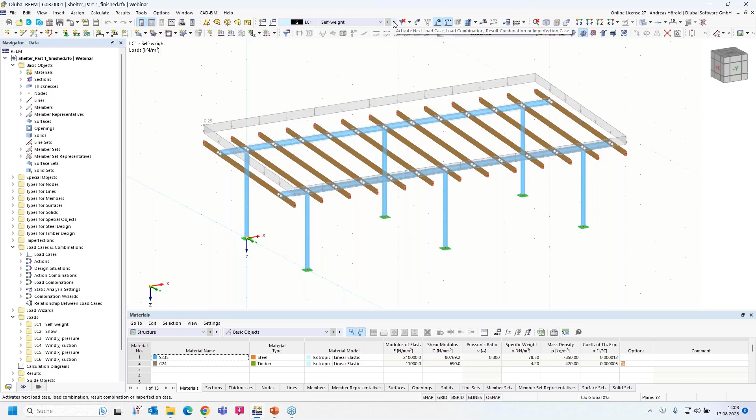Then I open the program. That's the state from the first part of the webinar that we presented last week. I created this model and the different load cases: self-weight, snow, 2 wind load cases in Y direction and 2 wind load cases in X direction. I go back to the base data, what we selected last week.

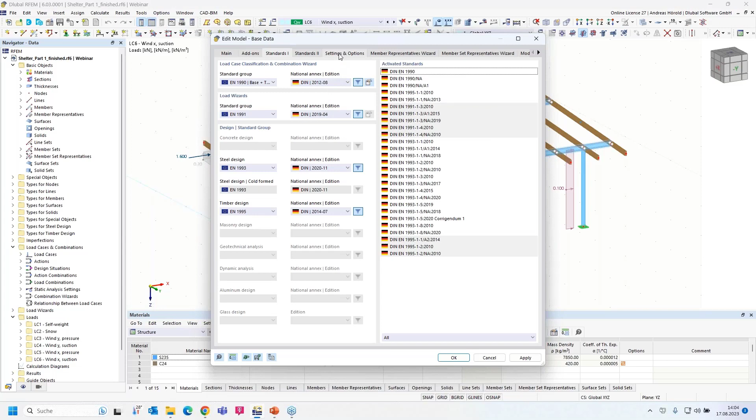I activated the 2 add-ons, one for steel design and one for the timber design. Also, the combination wizards are checked, and I selected the different Eurocode standards with the German National Annex. And under settings and options, I activated the member representatives and the member set representatives.

I would like to design only one representative, for example, and all members that have the same properties, the same length, for example, same cross-section, are collected in one representative, and I design only one of them. So in the member representatives wizard, all steel and timber design properties are checked, and the same for the member set representatives. Okay, I'll leave the dialogue and I start with applying the imperfections.

On the left side, you can see the navigator data and then the folder imperfections. At first I have to select or create an imperfection case. I can do that with a right click and then new imperfection case. The imperfection case collects the imperfections. After the creation of the imperfection case, I need to create the imperfections.

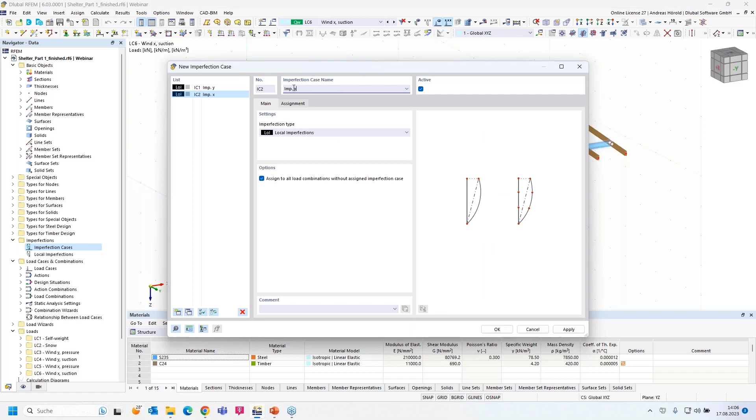Then on the bottom left, I check create new imperfection case. I call it imp x and assign the wind load cases in x direction. And you can see in the combinations in the background, the combinations are created automatically, and you see only the combinations with wind load case 5 and 6, and not with load case 3 and 4 anymore.

Now you can check that here. Same for imperfection y. You can't see any combination with the wind load cases 5 and 6. Only with 3 and 4, and of course the other load cases, load case 1 and load case 2, the snow load case.

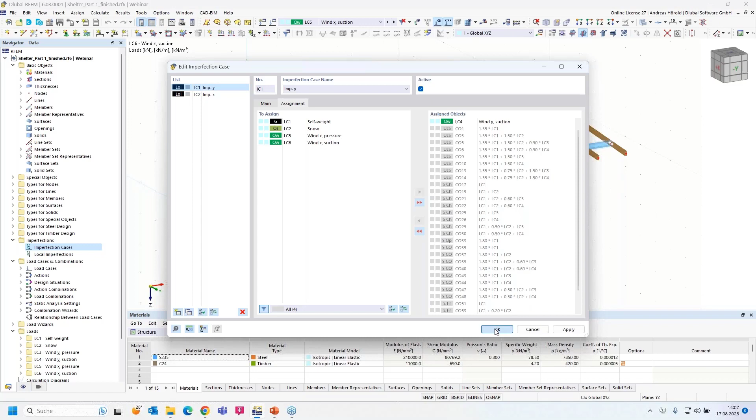Okay, I leave the dialog, and then if I go to the navigator data, I can open the local imperfections, and for example under the folder imp y, I can create a new member imperfection. With a right click on it, I can select new member imperfection. The other way is to go above here and select the button new member imperfection.

So the right imperfection case is selected. I would like to create an initial sway. I would like to assign the initial sway to the steel columns, and I will use for the steel design the equivalent member method in combination with imperfections and calculation according to second order theory. That's sufficient for the design according to the equivalent member method.

Okay, this definition type, Eurocode 3. So the coordinate system is local. Okay, I forgot to show the member axis systems. I select Y. I know that from the test. So then I measure the structure height. I measure the longer column. Doesn't matter that this column is a little bit shorter.

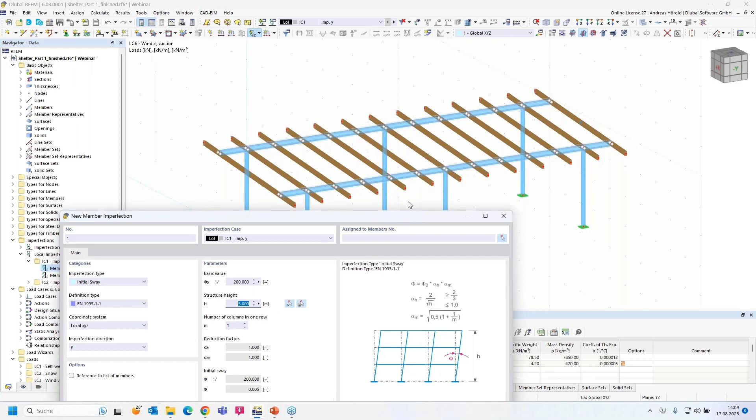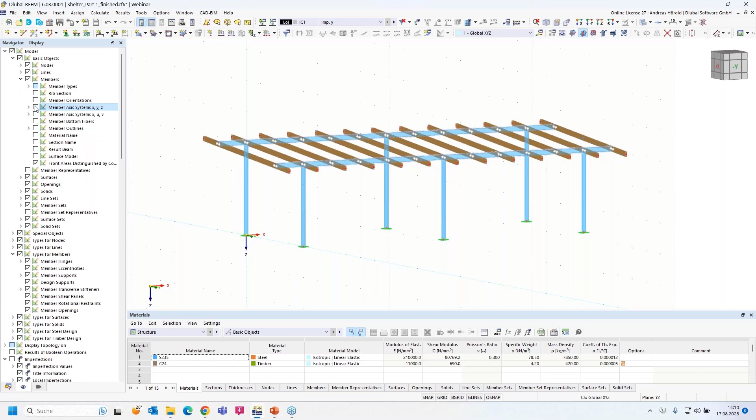2 columns should be in one row. This one and this one. And I can press OK. And I need to select the different columns. Okay, I must go in the dialog again. But before I do that, I go in the navigator display. And then under members, you can find the member axis system. So now you can see the local member axis system.

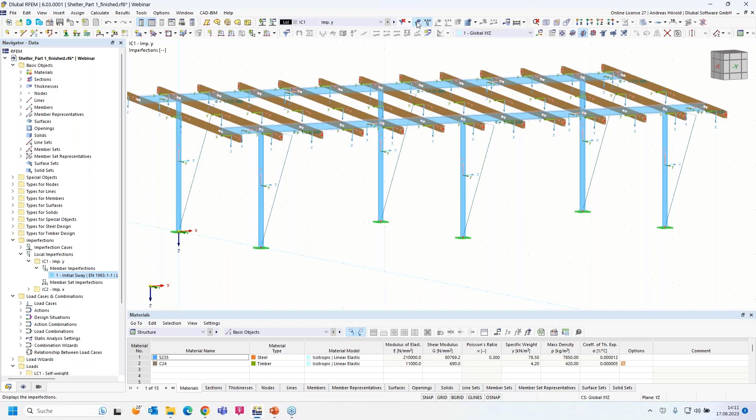And now I turn back to the navigator data, double click on the initial sway, and you can see the local Y direction is the same as the global Y direction. So I assign the different columns. Okay. And I have to select this button above, show imperfections. So the imperfections are created correctly.

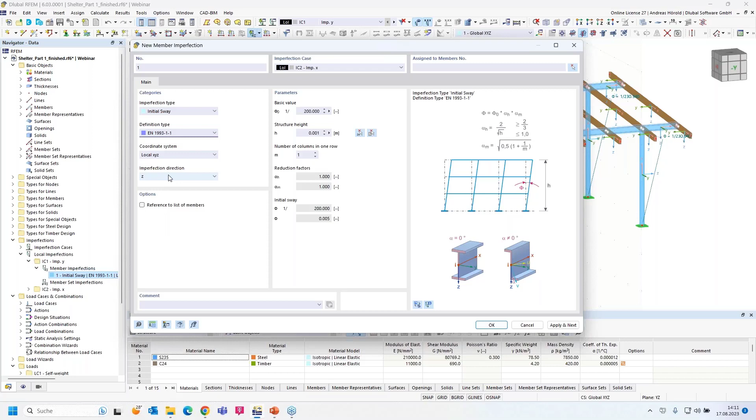So then the next imperfection, new member imperfection. This time I have to select the imperfection case 2, imp x. Again, initial sway according to Eurocode 3. This time imperfection direction Z. You can see this is the local Z direction. It's the same direction as the global X direction. Structure height is 3 and 3 columns in one row. Okay, and I select the different columns. So I select the other imperfection case, and you can see that the imperfections are defined correctly.

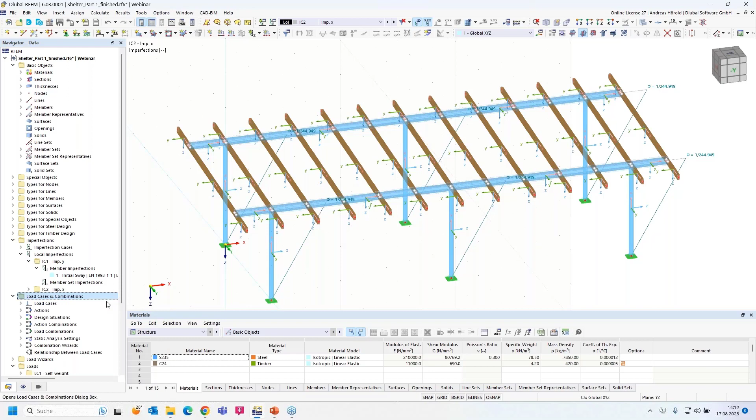Okay, then we can turn to the load cases and combinations. Here on the left side, navigator data. I right click on it and open the load cases and combinations. That's what we defined in the base data, the Eurocode 0 and the German National Annex, and of course the base and timber, because parts of the construction are from timber. And when I edit the parameters of the National Annex, I can see the KDEF factor. It's the service class 2 and it's 0.8.

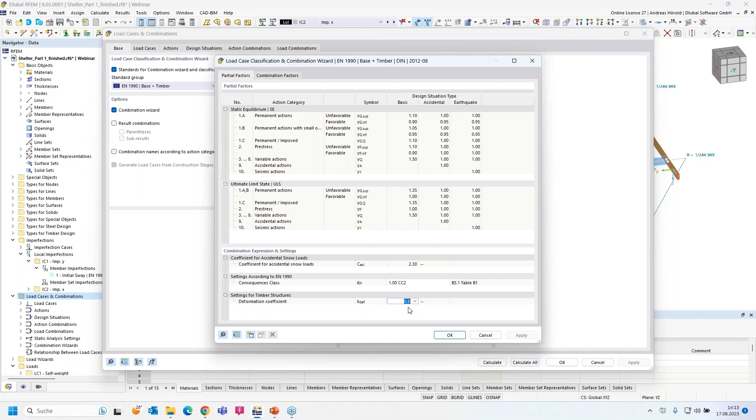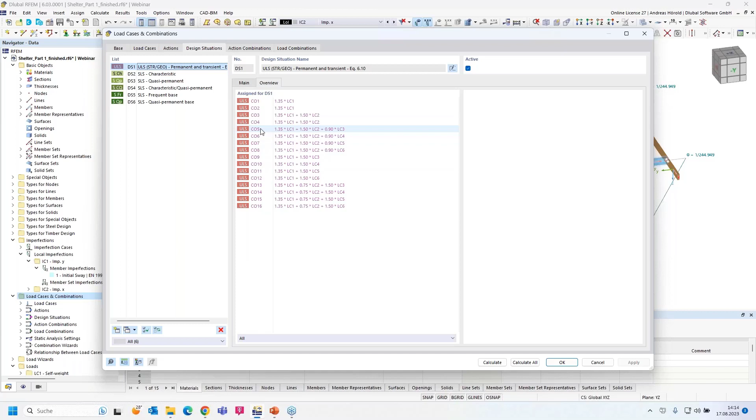Okay, so the combination wizard is activated. Those are our load cases, in the next dialog, the actions. And for the wind load cases, it's important that the alternative action type is activated. It's done automatically. You can see the 4 different wind load cases, so that we don't have more than one wind load case in one load combination. Then the design situations, 1 for the ultimate limit state design and 5 for the serviceability limit state design. If you click on one of them, you can go to the overview and see the different assigned load combinations.

And in this dialog, you activate the add-ons. You can also assign concrete design. If you activate the add-on, we activate, for example, for the ultimate limit state design, the steel design and timber design add-on. Let's go to the action combinations. And the important thing, the load combinations for ultimate limit state design and serviceability limit state design. At the moment, we have got 60 load combinations.

Let's go back to the design situations. Of course, we will activate the steel and timber design for the ultimate limit state design. For design situation number 2, the serviceability limit state design characteristic, we also activate steel design and timber design. That's all for the steel design.

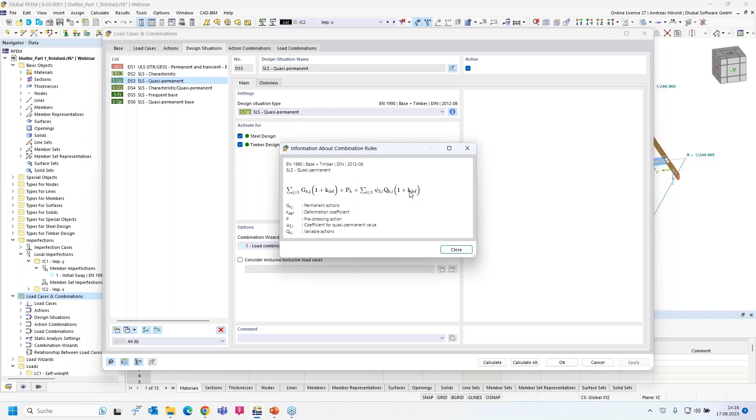And we check if we need this serviceability limit state design quasi-permanent for the timber design. I go to the info button, and in the combination rules you can see the KDEF factor, which is quite important for the timber combinations. That's why we need this design situation for the timber design. You can leave the dialog, uncheck the steel design. We check the same for design situation number 4, information, and we can see the KDEF factor again. That's why we need it also for the timber design.

And we don't need it for the frequent base. You can't see the KDEF factor here. So that's why I delete these 2 design situations.

So again, this design situation for both - this and design situation 3 for timber design, and 4 also for timber design. So with the Shift key, I select the 3 serviceability limit state design situations and check the geometrical linear analysis. And for the ultimate limit state design, the second order theory.

So now we go back to the load combinations, and you can see there are 45 load combinations. Let me check if all is correct. Yeah, all should be correct. So that's all for the combinations.

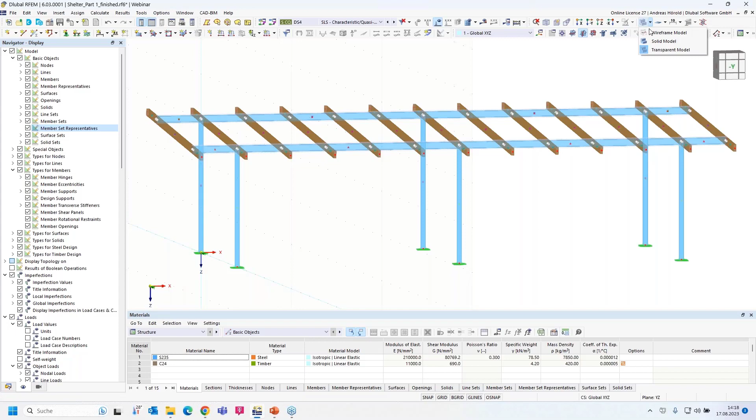You can see these 3 columns are in a group, in the same group. It's the same member representative, member representative number 4. Now you can see that in the different color of the points in the middle of the member.

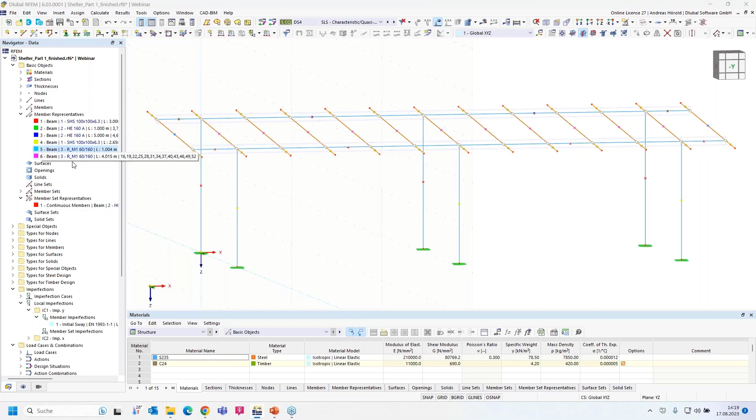So I go left on the bottom in the navigator data to the member representatives and the member set representatives. So that's the timber representatives. You can see that's the cantilever beam, and that's the inner beam here. And I start with this inner beam made of timber.

Okay, then I go to the design type. You can see the service class number 1. That's not correct. I add the service class with that button and change the service class to moist.

You can see this preview image, that's what's valid for our structure. You can see the timber structure on the outside, but there's a roof over the timber structure. That's the case for our structure.

Okay, I don't define any effective lengths. We don't do stability analysis for the timber beams. I assume that I've got nailed formwork of timber on the upper side of the purlins, or a stiff plate nailed on the upper side of the purlins. And it should be quite stiff.

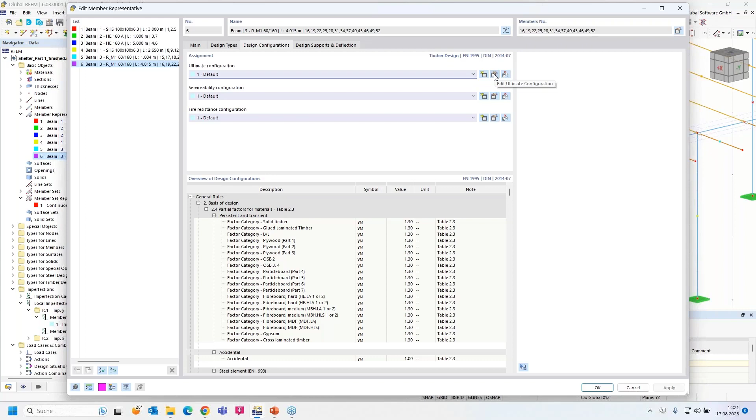So I go to the design situation, ultimate configuration, and select edit ultimate configuration, and uncheck the stability analysis. Okay, and yeah, we leave the standard parameters. I apply with OK.

So I go back to the button, the design situation and serviceability configuration. I press the edit button, and I leave the parameters from the standard. Okay, and we don't perform any fire resistance design.

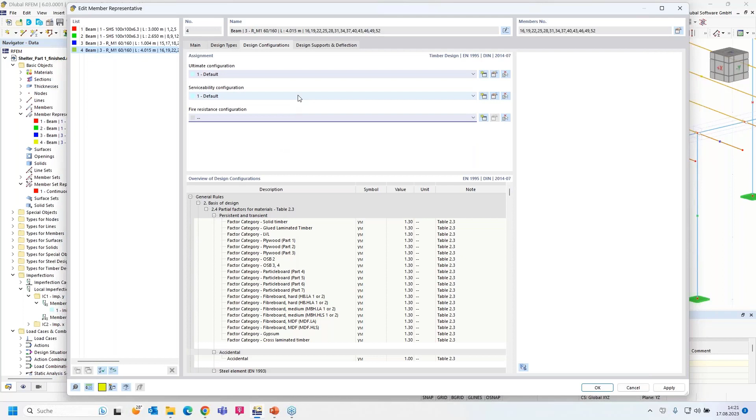So the next dialog is the design supports and deflection. Now I have to enter a support at the member start and the member end. I press this button, create new design support for member start.

The type is timber. Direct support. The support length is 160 millimeters - that's the width of the steel beam, the HEA 160. The support width is equal to the width of the member, of the timber member.

If you change the width of the timber member later, it will be calculated automatically or changed automatically. It's an inner support. We do the design only one time for this member and not for the cantilever beam.

And we say it's an inner support, that the program uses the complete length or the complete width of the support. In our case, the steel member.

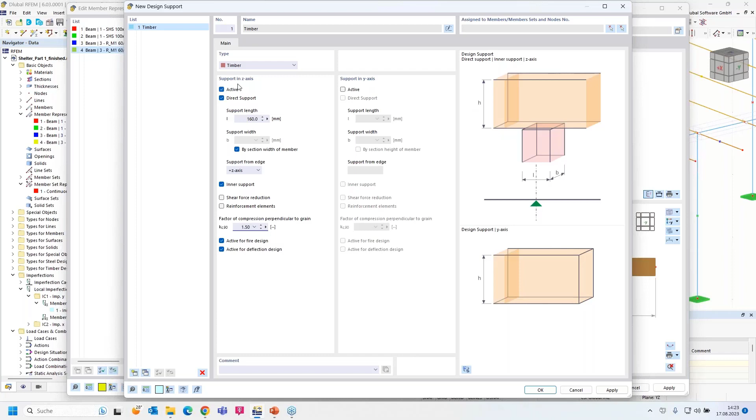So I need to define the factor of compression. I select 1.5, softwood, discrete supports. Okay, so it's only supported in Z direction.

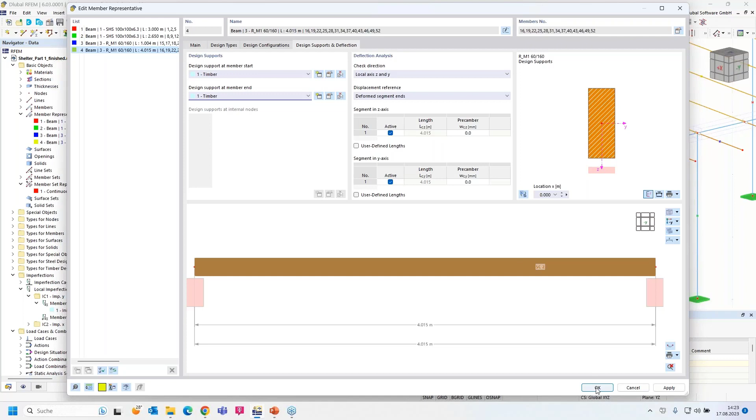Okay, so the design support should be at the member start and the member end. Okay, yeah, that should be all for the timber design, but I checked the beam number 3, the cantilever beam.

Design types, the same service class 2, the same design configurations, no fire resistance design, and we don't need to define any support. We design the support with the beam number or the member representative 4. Okay, that's all for timber.

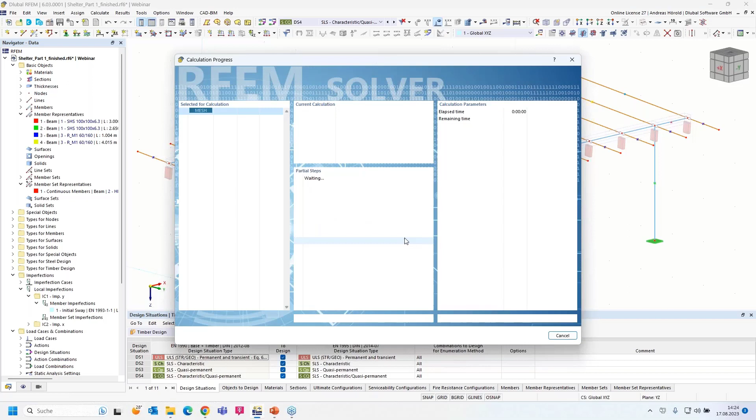I can run the calculation here in the table on the bottom - steel design, timber design, sorry. And I press this button, show results. And this runs the calculation.

Program calculates all combinations, but simultaneously - it's a new feature in RFEM6 - a multi-core calculation. My computer has more than one core. That's why the combinations are calculating in parallel.

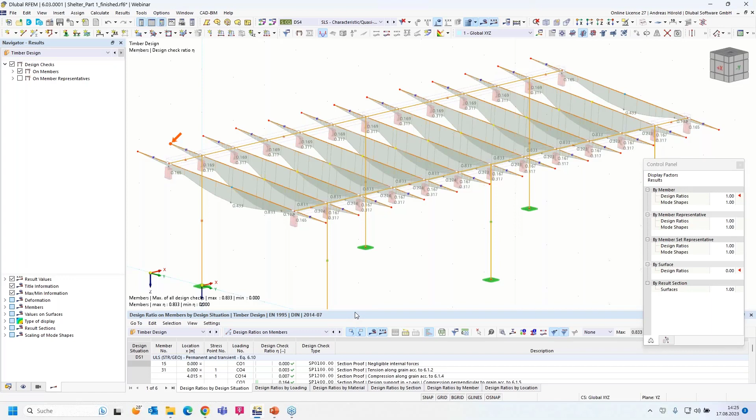So I show the design ratio on members. You can see the different design ratios.

68% for the serviceability limit state design. No, the maximum is 83 for the serviceability limit state design. If you double click on the line, a new table is opened.

You can see the design formulas, also the equations from the standard. Let me select another one, maybe a section proof, for example, this. I can double click on the line, or I can use that button, design check details, and you can see the equations and the equations from the standard.

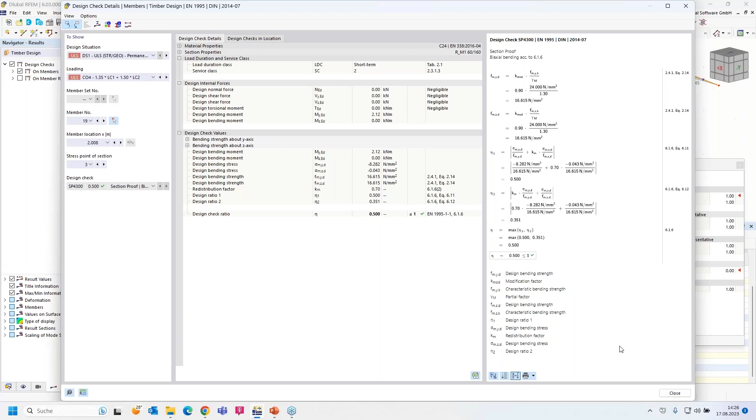Complete design. And you can print it directly with that button, print graphics to printer, and print graphics to printout report. A very nice new feature of RFEM 6, often wished from our customers, and we implemented it for RFEM 6.

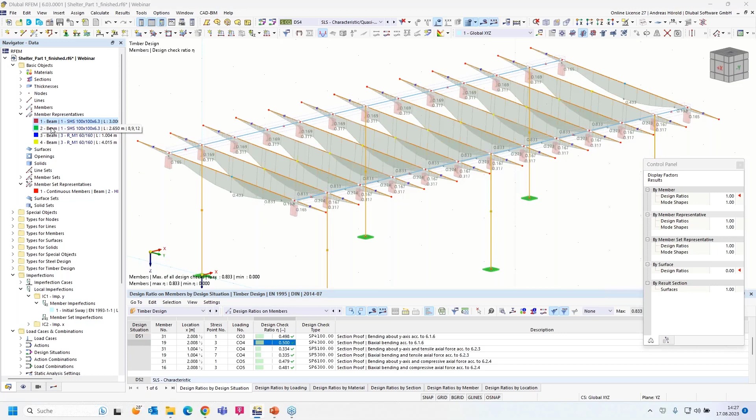So, okay, that's all for the timber design. We continue with the steel design. I select the member representatives 1 and 2 and do a right click, edit.

Those are the columns. You can see them on the cross section. Design types. I select the effective lengths. I will, as I already said, use the equivalent member method. That's why I have to create effective lengths. Another way would be to use the general design method.

Then you need to define boundary conditions. So I create a new effective length. The flexural buckling and torsional buckling should be designed. I check all. So, I leave the member lengths by 1.

The effective length factors, SK, should be equal than the member lengths. Because I assigned imperfections and used the second order theory for the ultimate limit state design, that's sufficient if I leave the member lengths to 1. Okay.

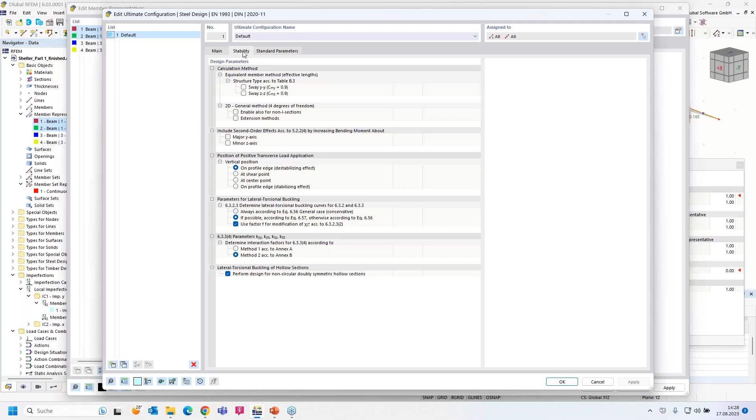So then design configuration, default. I go to the edit button. I perform a stability design and I leave all checks as they are. Apply with OK. Serviceability configurations, let me check it with the edit button. And I leave the standard parameters as they are. Okay. And I don't do a fire resistant design.

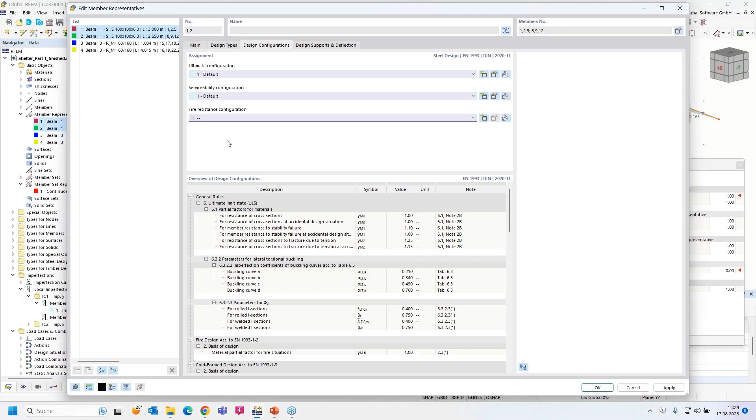So then design supports. I have to create a design support at the member start. I see it as a cantilever column, what is rigid supported at the member start.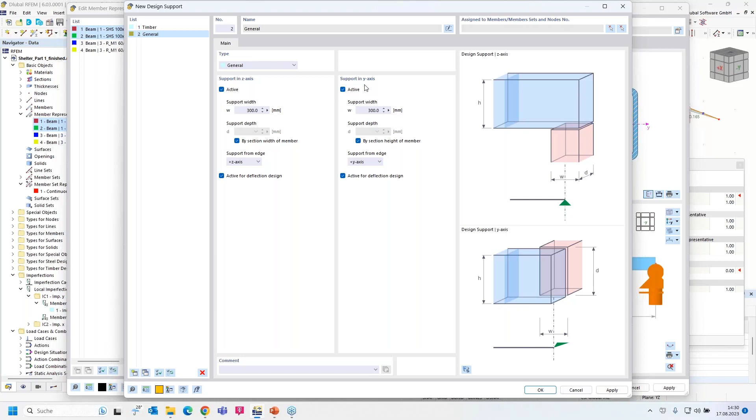So, new design support, general support, and I leave all parameters as they are, but I select it for both directions, for the Z axis and the local Y axis. Okay, but only at the member start. You can see that in the preview.

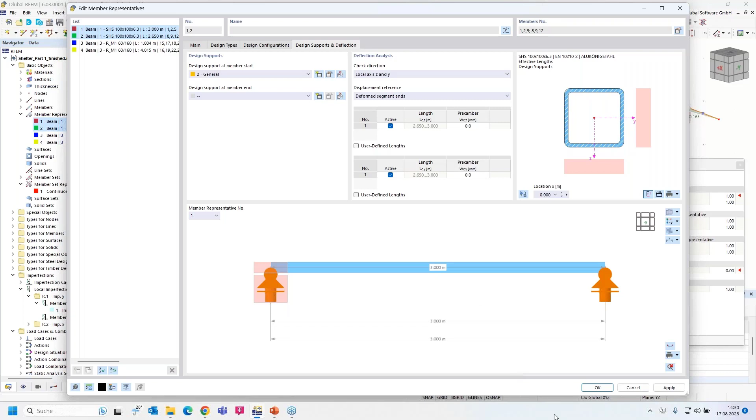So that's all for the member representatives. You can leave the dialog. All results are deleted. And I continue.

I deselect the results. So I continue with the member set representatives. These two sets of members are contained. I double click on it. So, and I can see there are no design tabs here.

I leave the dialog and I select the member sets, or they are selected. I double click on one and I have to check or set this check here, design properties. Now it would be also possible to enter here the design types, the design configurations, and so on. But yeah, I will use the member set representatives.

I'll leave the dialog. Double click on it. Select the design types. I will use the equivalent member method again. Create a new effective length. Nodal supports and effective lengths. So, with this button, I select one set of member. And I can see there are only 3 inner nodes.

And that's not correct. I leave the dialog. Okay, I can see only 3 nodes. We check why. As I copied the purlin in the first part of the webinar, the member wasn't divided, and now this node is missing for my set of member. So I'll correct that.

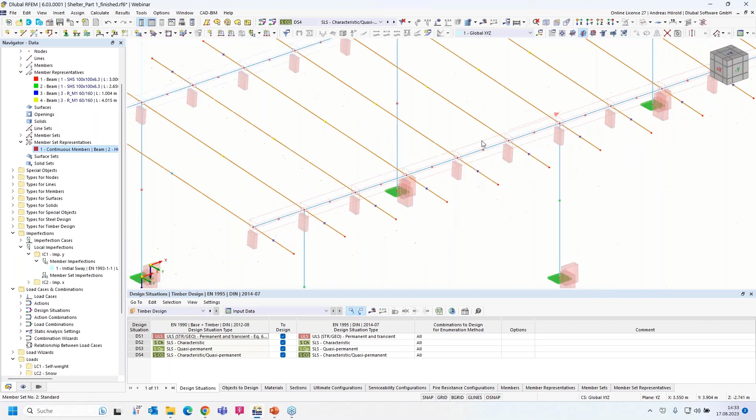I use this function here right above, connect selected lines, members, and so on. I select it. Okay. So, and select this member and this member. Okay. And now the member is divided. There are only members with a length of 1 meter, but the member set is still the whole beam, or all the beams are collected in 1 member set. Same on the other side.

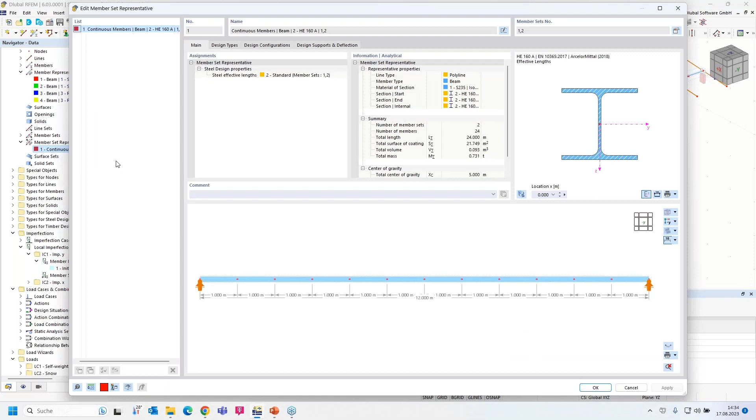Okay, I turn back to the member set representative, double click on it. So, go to the design types, and I edit the effective length.

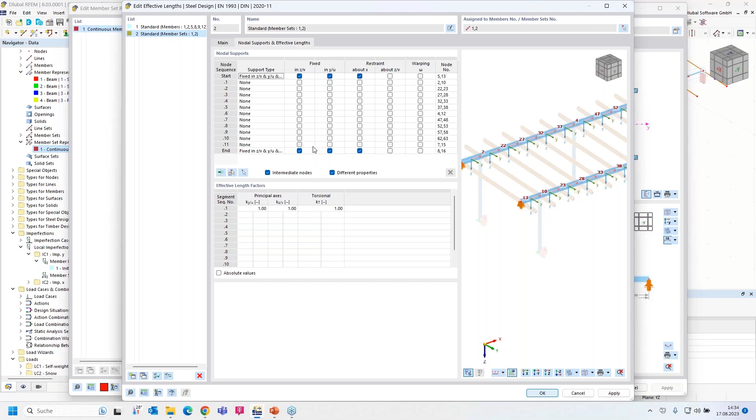Click on the 1 member set again. So now our inner supports are here. I can open the preview on the bottom. You can see the 2 member sets. Now I can select more than 1 node and assign the different support directions and so on. I'll use that button to select nodes.

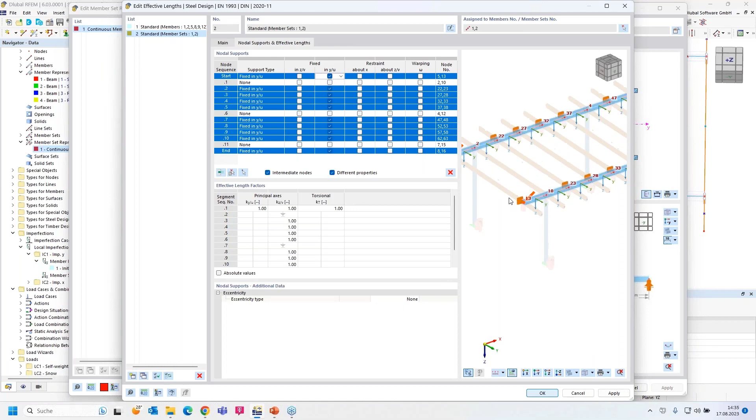I do that for only 1 set of members: this node, these inner nodes, and this node. All are selected, and I check only the support in Y direction. You can see in the preview that this is okay.

Now I use this function again, select nodes. I select this node over the column, the 3 nodes over the columns. It should be fixed in Z, Y direction, and about the X-axis. It should be a fork support. So now all is correct for both sets of members.

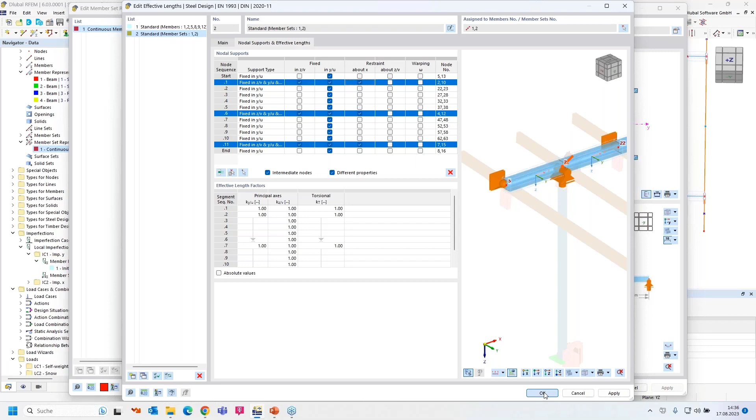And we collected it in one member set representative. I can leave the dialog with OK. And you can see in the preview again that all is defined correctly.

So then, design configurations. We leave the same configurations for the ultimate limit state design and for the serviceability limit state design, and we don't perform any fire resistance design.

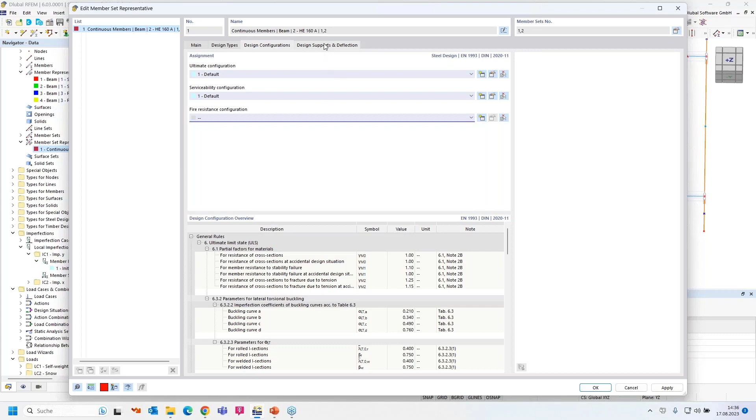Okay, then we have to define supports, or design supports. At this point, use the general design support at this point over the column, and in this node over the column.

And we check the direction. It should only be designed, or the serviceability limit state design should be performed only in the Z-axis, because we have the stiff purlins and plates on the upper side of the cross section.

That's all. We can leave the dialog and run the steel design calculation. Press this button here on the table.

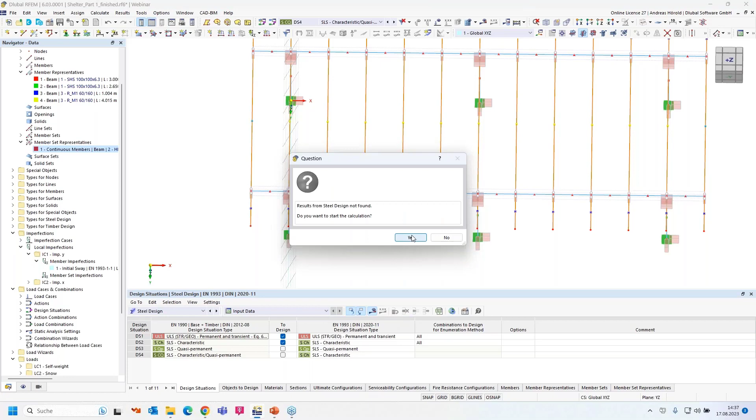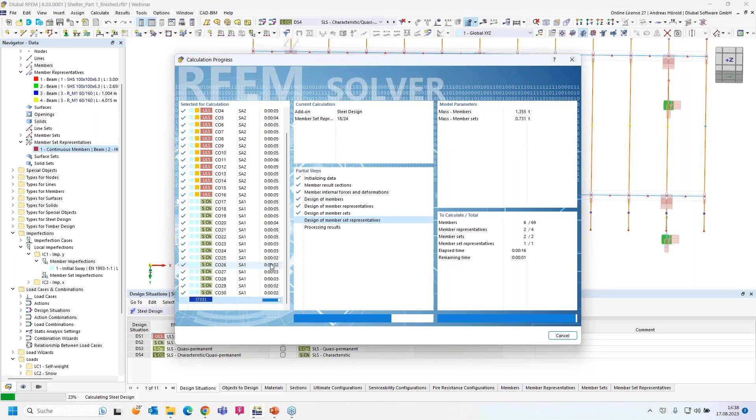All load combinations need to be calculated again, but with the multi-core calculation that's no problem.

Now you can see our results for the steel design. Let's go to the table, design ratios on members. The maximum value is 49%, it's the deflection in Y direction, global Y direction, for the column.

Okay, so let's select design ratios. Just a moment, design ratio on members, it's okay. By cross section, let me check. I can do that with the member representatives. Design ratios by section, that's the column.

And member set representatives by section, that's the horizontal beam, and you can see the maximum design ratio. It's about 25%. I think a smaller cross section is sufficient.

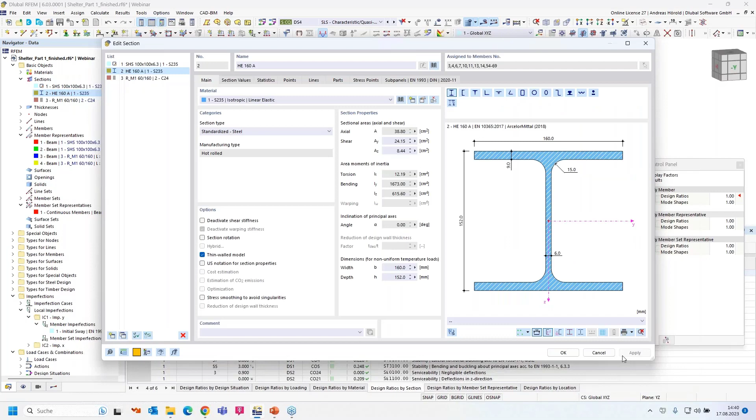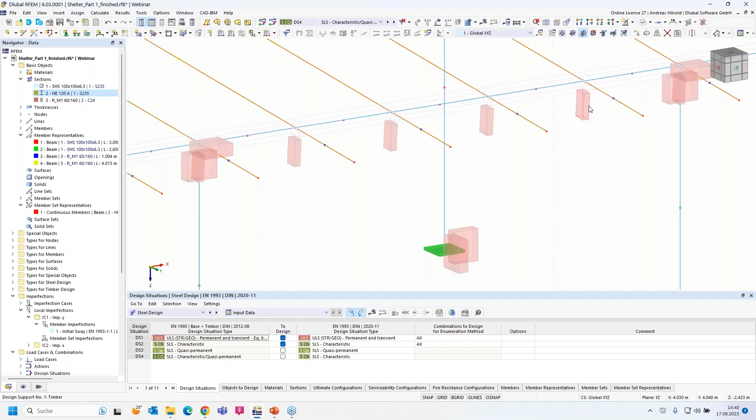So that's all, but you need to consider that we need to modify the design support, because the support length isn't 160 millimeters anymore. Now we've got 120 millimeters. And it's now correct for all design supports.

Okay, then we run the calculation again. With that button, you can run all calculations: the load combinations, design situations, and the steel and timber design in our case.

So then let's check the design ratios. Steel design. Here, design ratios by section. The column, almost 100% for the serviceability limit state design, and the horizontal beam has got a design ratio of almost 50%.

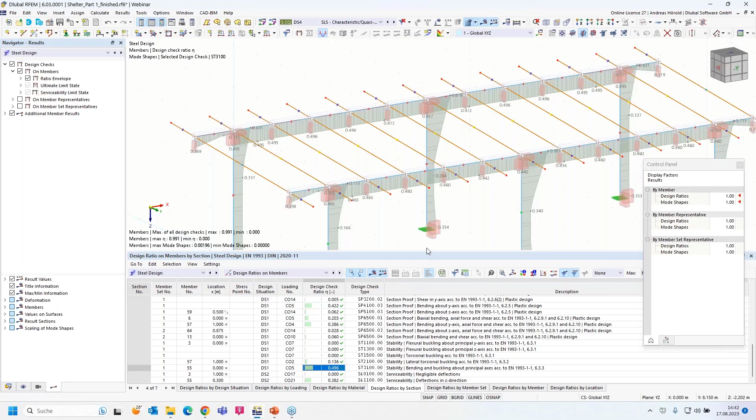Maybe we can optimize the column, or not the column, but the horizontal beam, but I leave it as it is, the construction. So, okay, that's all for the design.

Now we will create a printout report. At first, I would like to print the steel design graphic and the timber design graphic directly in the printout report.

Let me switch off the design supports. I turn to the navigator display. And sometimes you can't find any part of your structure if you want to deactivate it or disable it, but you can find it.

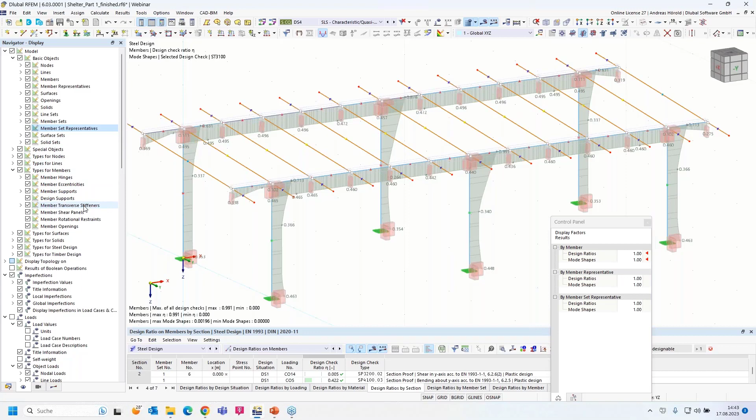Then I have got a tip. When you right click on, for example, the design support, you check the display properties. So, those are the properties for the design support. But what I need is the structure of the folders. Where can I find the design supports?

And you can see you can find it under the types for members. It's got nearly the same structure as in the navigator display. Types for members, you can leave the dialog. Types for members, and you can see the design supports, and I can uncheck it.

Okay, let me print this graphic. Left above, you can find this button. You can print the graphics directly to the printer, to a PDF, or to a 3D PDF. I use the function print graphics to printout report.

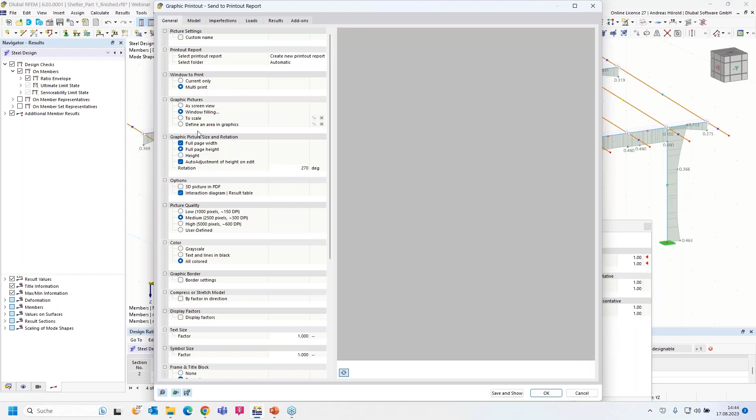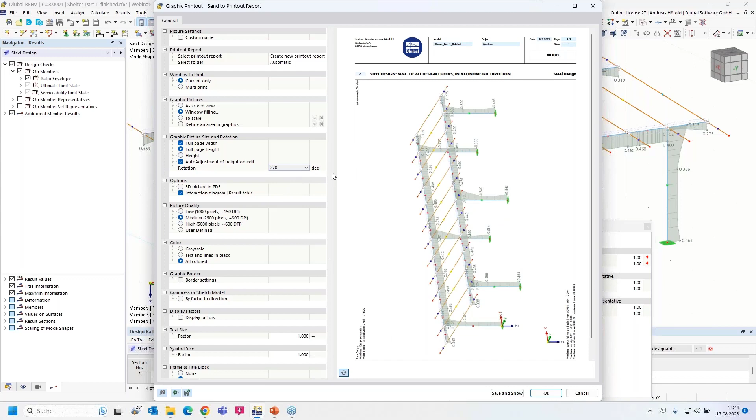I check current only. It's already rotated. That's 0 degrees. And I would like to rotate it clockwise 270 degrees. Okay. I press OK.

And now the printout report manager was opened. I have to enter a name, printout report 1, and can check the different report items. Let me go through them. I leave the first entries. Maybe we check the loads for the different load cases. That's quite new in RFEM 6, the parts list. Let me print some parts lists.

So we leave the static analysis results. Then there's the folder for the steel design. Let me increase the window. That's also a new feature of RFEM 6. I would like to print only the design ratio on representatives by section. So I uncheck the others. Okay. And design ratio on member set representatives by section.

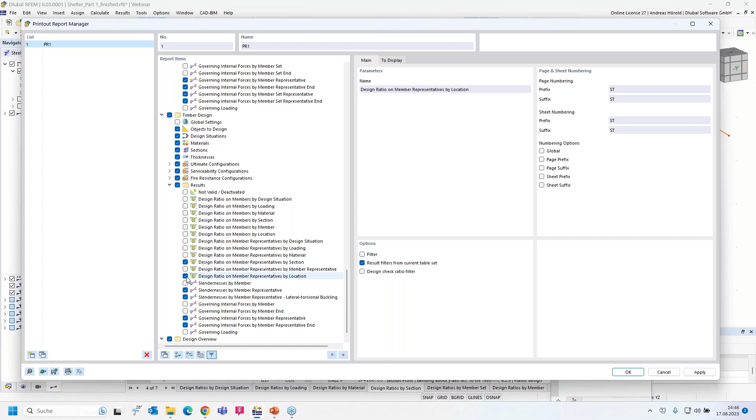Then timber design, the same. Design ratio on member representatives by section. That's sufficient. Okay, we can leave the dialog. We don't open the printout report. Parts of it were created. We print the next graphic manually. Here, timber design, left above, and the navigator results.

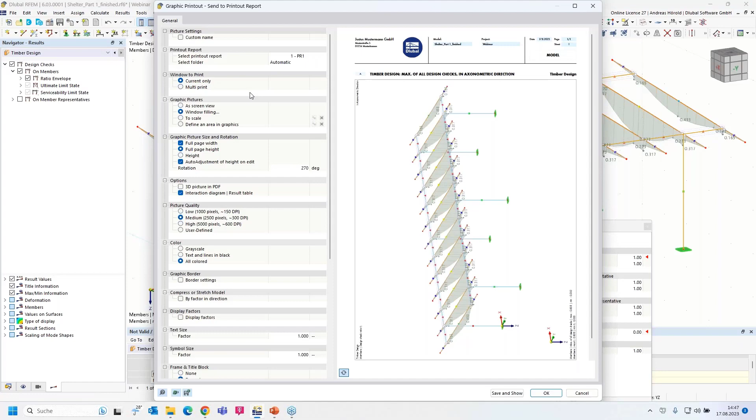The ratio envelope. So I move it a little bit and go above to print graphics to printout report. Same workflow, same rotation. Okay. And now we would like to use the isometric view for a multi-print. I select print graphics to printout report again, and I select the option multi-print. And now you can see different dialogs on the top. Model. We would like to print the isometric view of the model, the current view. Then imperfections. I select them all, meaning 2 imperfections, the current view.

Loads. Not all items. I select the 6 load cases. Okay. Current view. You can also check other views, in our case without imperfections. That's also only an example. You can print what you want, but I would like to show you how you can print several graphics in one step. So load cases and combinations. I select only design situation number 1. I remove the load case with that button, and I select design situation number 1. Okay. Current view.

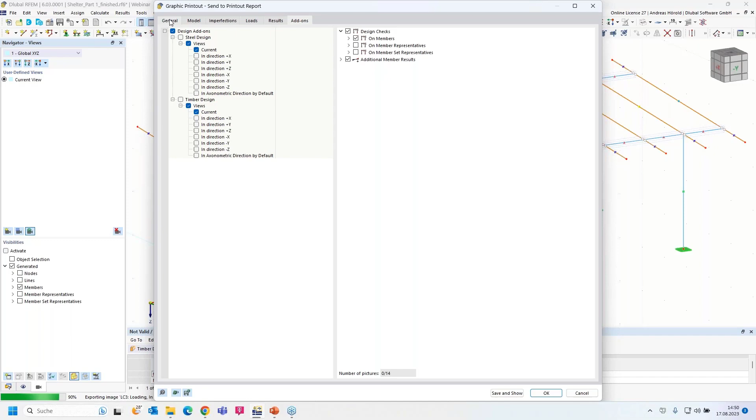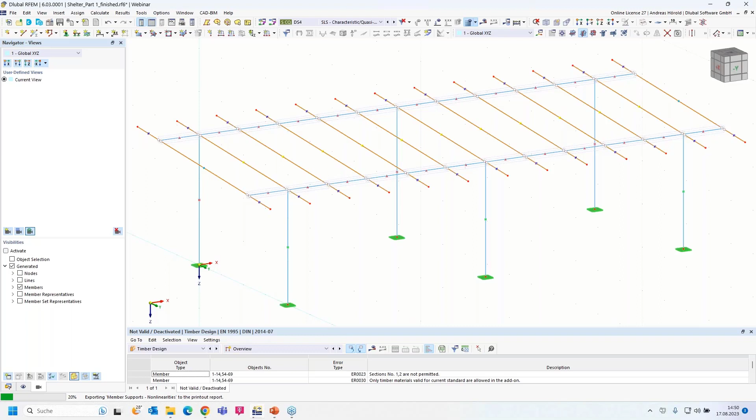Members, internal forces, only as an example, N, V, and M graphics. Okay. Now we don't print the add-on graphics. I printed only the 2 add-on graphics manually. And we can see on the bottom that there are 14 graphics. Now if I go back to the general view, you can see the previews of the different pages, the model, imperfections, and the loads. Okay, now I press save and show, and the printout report with all graphics is created in some seconds.

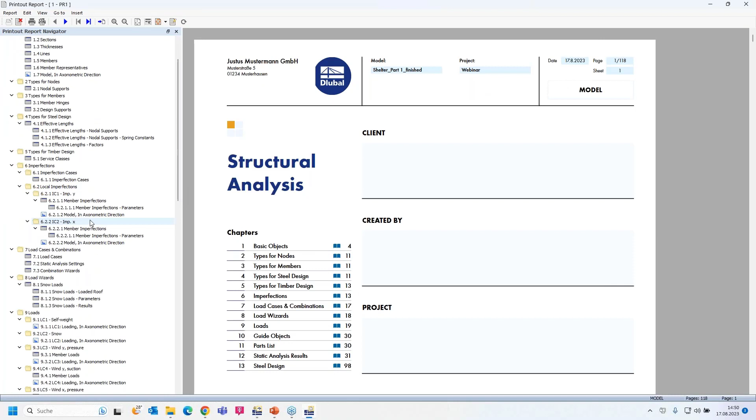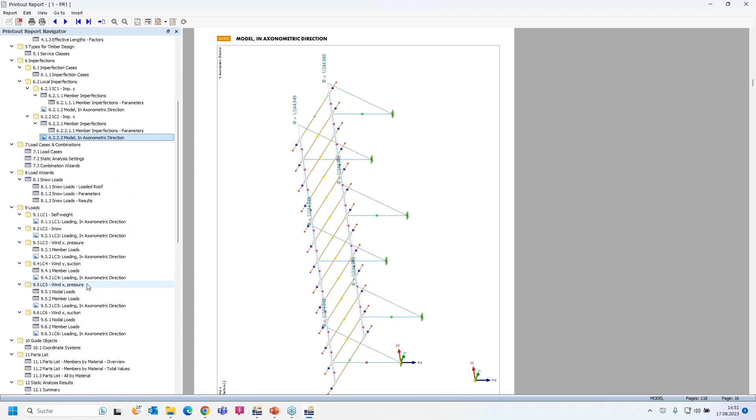Okay, that's the printout report. An important new feature is that you can work in the printout report and in the model in parallel. I can show that only like this on one screen. And let me show the different graphics. They are in the right place. The model under the base data folder. Then the imperfection graphic under the imperfection case and under the local imperfections. Okay. Then the different load cases under the loads.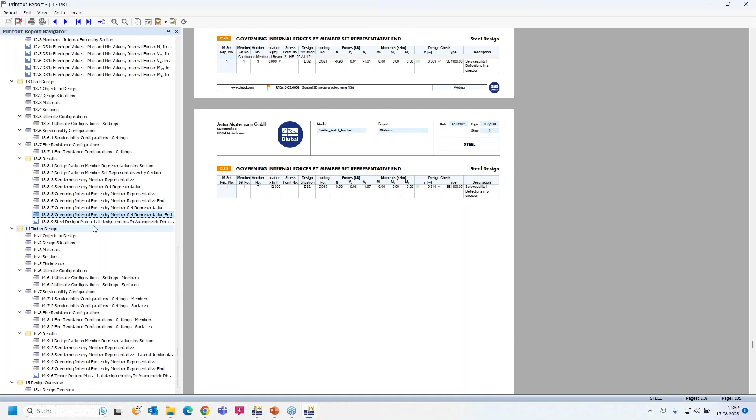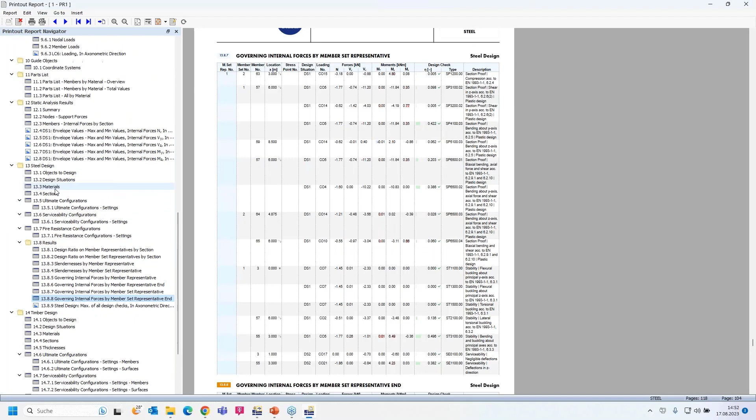Then under static analysis results, you can see the different graphics: N, V, and M. And under the folder timber design, for example, you can see the timber design graphic. And I skipped the steel design. That's the graphic for the steel design. Before the graphic, you can see the tables with the results of the design. Okay, let me show you the parts list. Parts list, members by material overview. This graphic. I can zoom in a little with the control key and the mouse wheel, for example, or with the buttons above. Zoom out and zoom in. That's all okay.

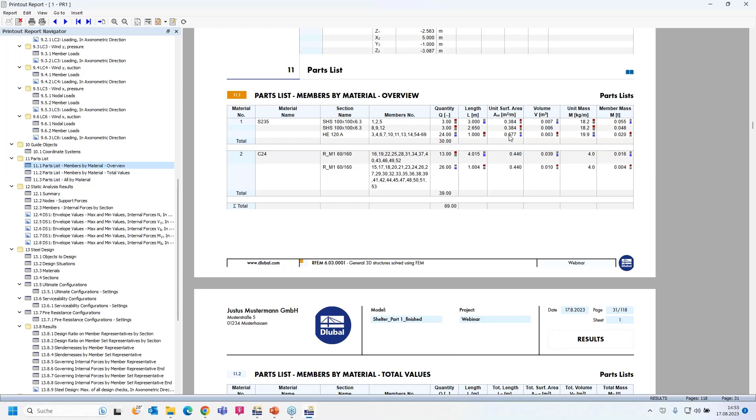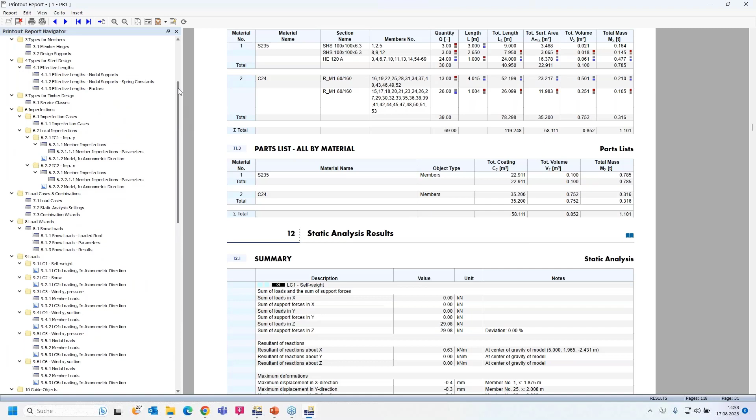And you can see the different lengths of the members, the sum of the steel parts and the timber parts, and the sum of the unit surface area, for example, and the unit mass, and so on. Okay. Then let me turn back to the cover. It's the start of the printout report. You can modify the cover, you can enter a client and so on. I right-click in the menu here, press edit. You can select the preview image or deselect it. I enter a client, John Doe, created by me, Harold, and the project, we call it roof on market.

So, okay. That should be all, or we don't call it roof, we call it shelter. Shelter on market, okay.

So then you've got other settings. For example, you can enter your company name here. You can upload a logo. That's the Dlubal logo. And do a page setup, printer settings, and so on. Okay, that should be all. I leave the dialog. Okay, the value from my printer is not enough. That should be okay. So now you can see the modified cover with the text.

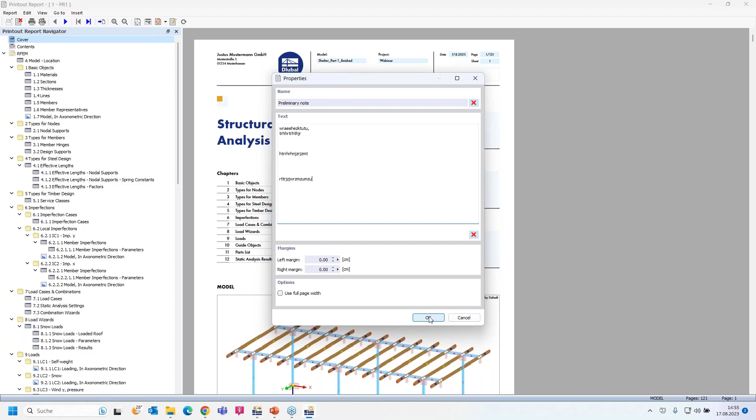And it's added at the end of the printout report. You can see the preliminary notes. So I moved the item to the document start. So that's the content, and you can see the preliminary notes here. Okay, let me go back to it. So you can enter properties, so you can change the text anytime.

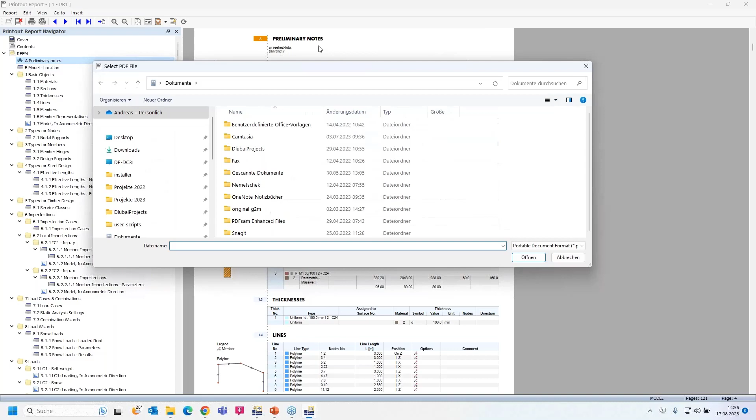Then I insert a PDF. So from my desktop, I prepared a PDF from our Geo-Zone Tool. I think you know that from our website. I can enter all pages or a selection of the different pages. So I press the OK button, and then the PDF has been added at the end of the printout report.

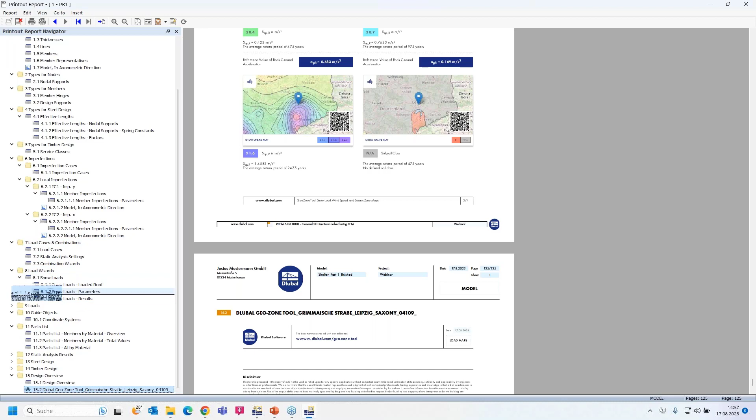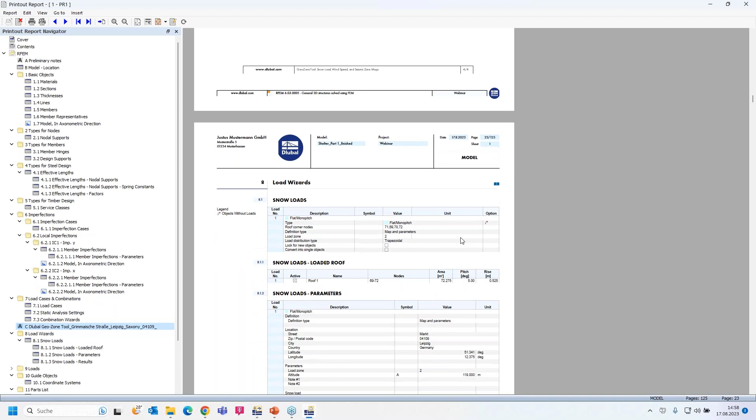I can move that, for example, also with drag and drop. Let me do that. I close these folders and I move the PDF before the load wizards. Okay. So now you can see the PDF here. And then the load wizards follow, now also with the location and so on.

Then edit. Okay, that's also quite important. You can set a language. The program can translate the printout report into 10 different languages. It takes only some seconds to translate such a printout report, for example, into French, Spanish, German, etc.

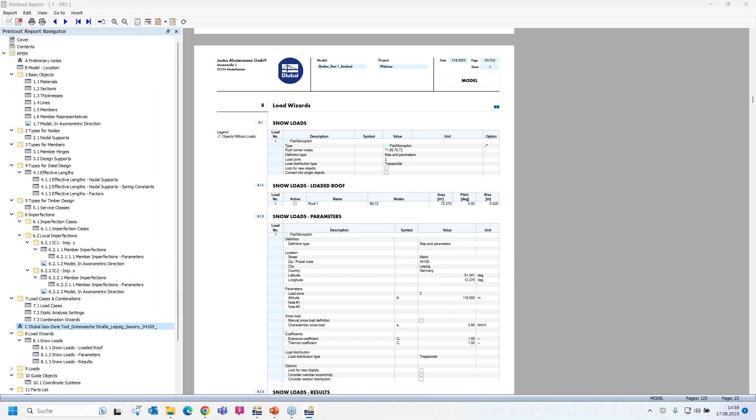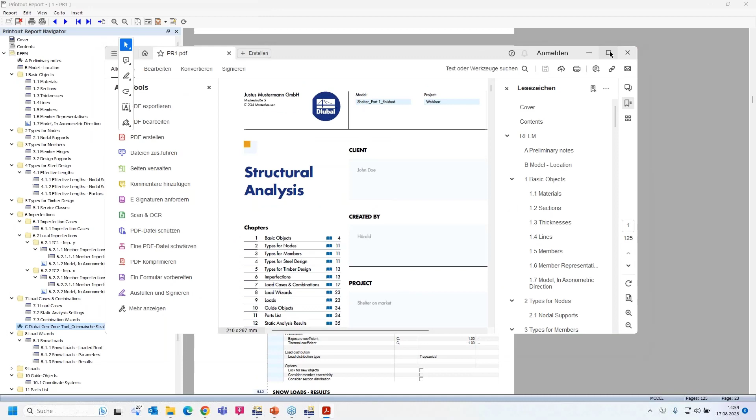Then report. You can print the report directly, or export it to PDF or to HTML. Let me export it to PDF. To my desktop, PR1, printout report 1. I save it. The PDF is being created, and I open it. You can jump between the different chapters on the right side. All tables and sheets and graphics are printed in the PDF.

Okay, yeah, that should be all for the presentation.